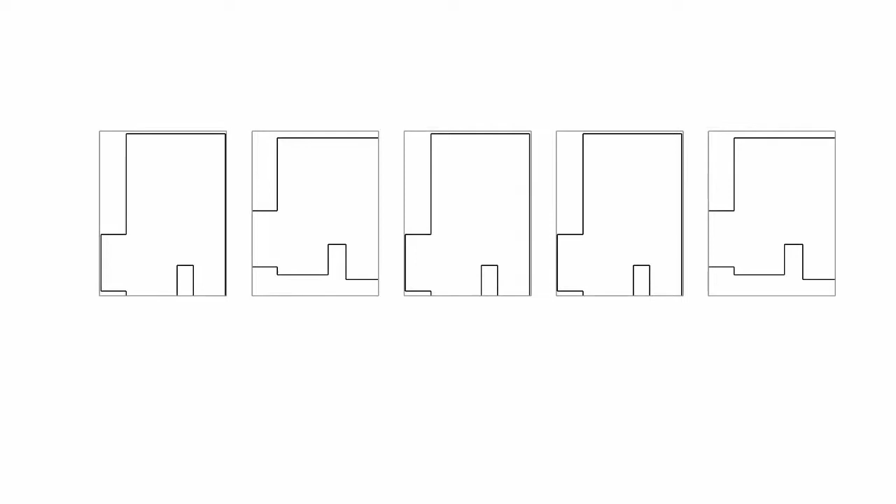To the civil engineer and surveyor, the home or commercial building is simply a perimeter of the building. This perimeter is not the actual perimeter configuration, but instead typically an imaginary maximum width and depth of a possible building. To the architect, especially on production housing, the lot is simply a rectangle the home fits on. They will assume a home will be built next to it and the main living space will be oriented to the rear of the home.

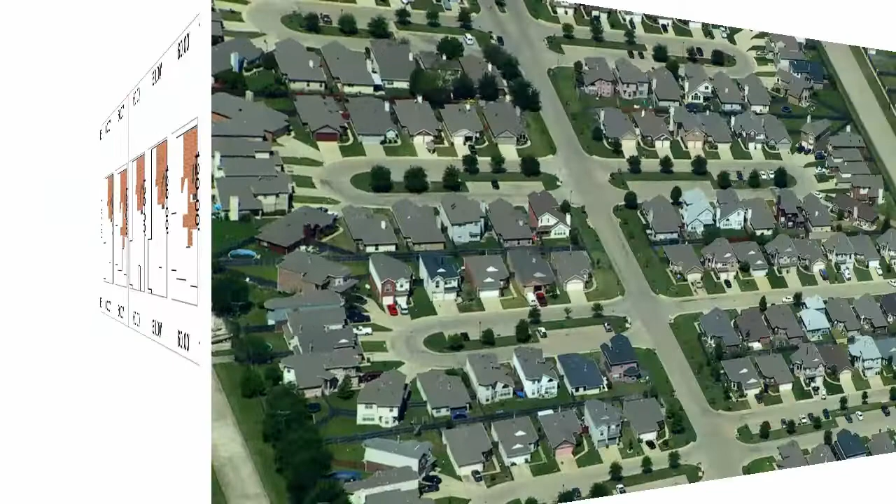When designing a subdivision or even a master plan community of thousands of homes, the plat of the streets and lot lines are recorded with no recognition of the home interior configuration that will fit inside those lots. If there are architectural standards, those will relate to the facade style, not how the home spaces function with the surrounding open spaces, if there is any open spaces.

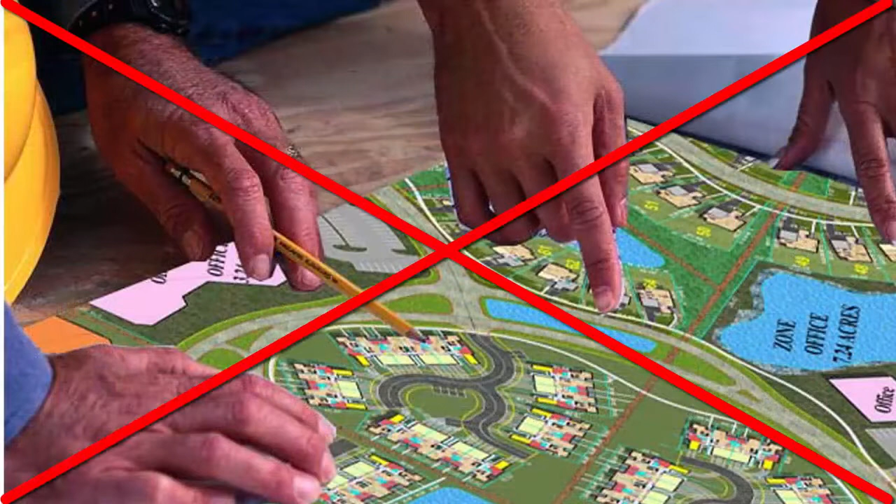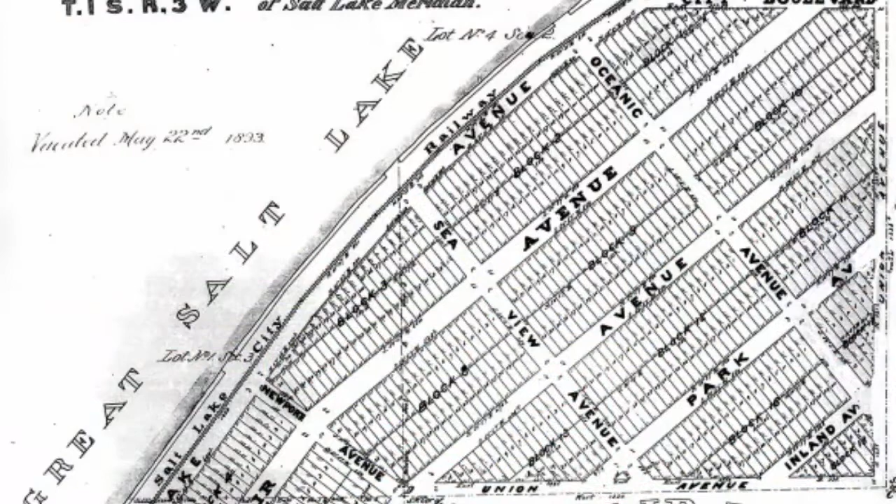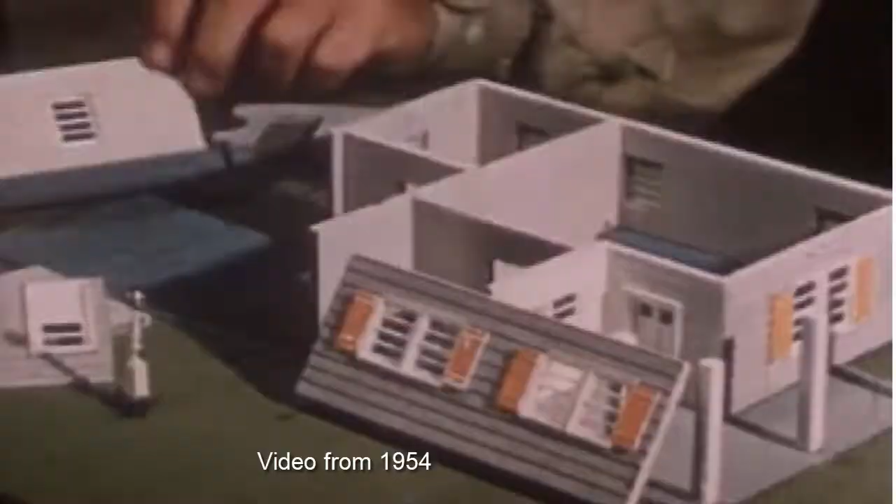Lack of communication and collaboration between the consultants is the major reason development advancements stagnate. It is why a site plan of the 1800s, an era where travel was by one horsepower, is eerily similar to a subdivision design in 2020. Yet today, it's not uncommon to have over 600 horsepower parked in the driveway. And it's why the floor plan efficiency of homes today are so similar in function to those of the past.

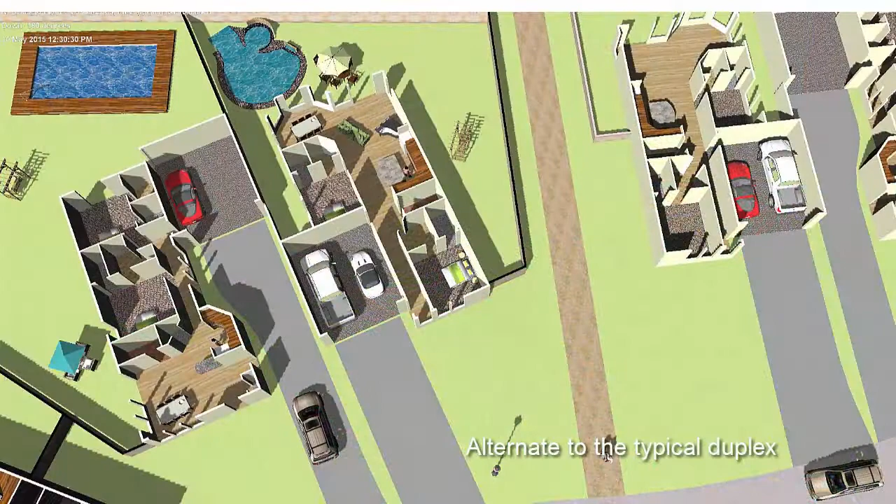In order to evolve and innovate design, we must develop a team approach at initial design stages, where planners, architects, and engineers collaborate to provide the best solutions possible for those developers and builders who pay them. Real estate value and livability can increase when architectural design merges with the site plan design.

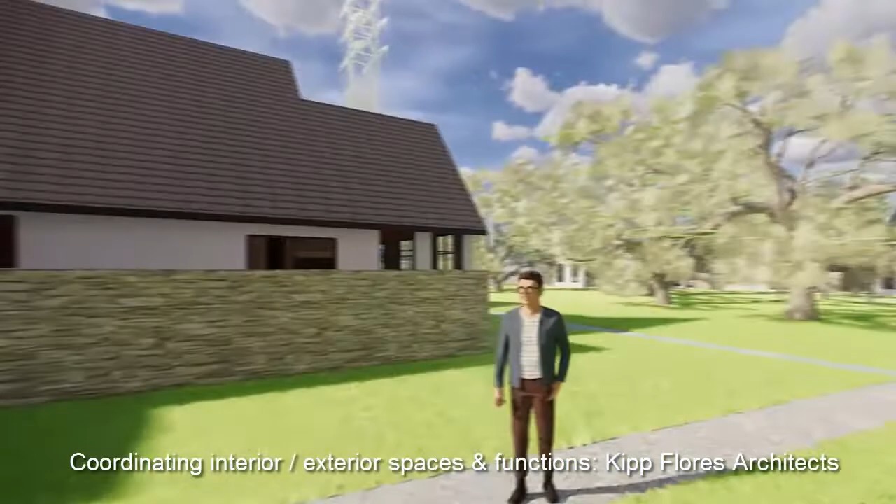Assuming you would be utilizing these sessions to design more efficiently, more open space can be provided around the homes by reducing excessive infrastructure. At initial concept stage, it's the ideal time for the team of consultants to create a game plan coordinating what goes on inside a home to the surrounding open spaces.

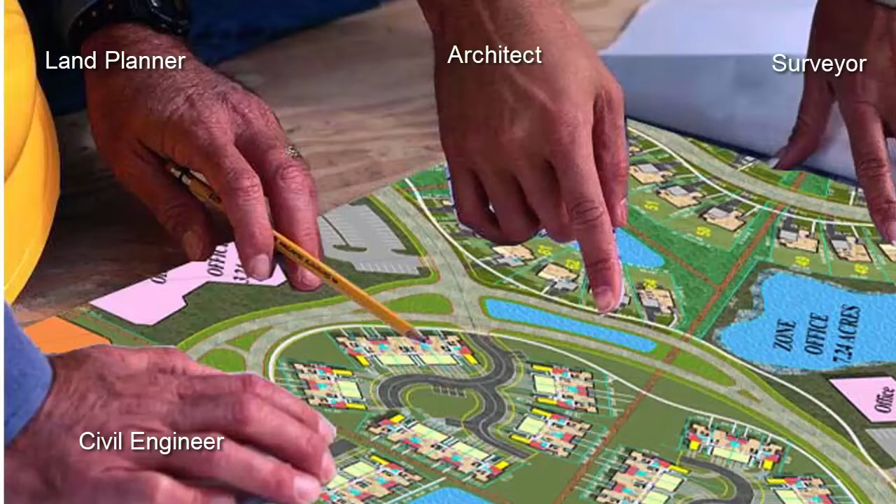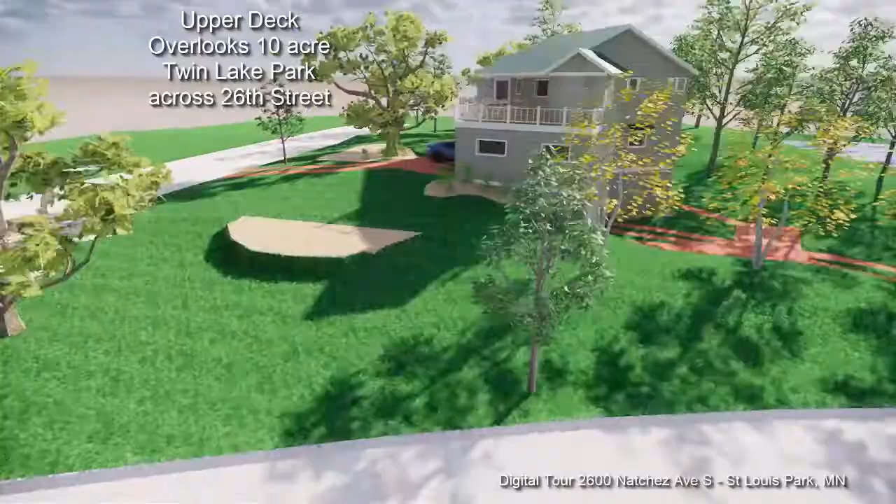Replicating this on a production housing scale, we provide the consumer with a completely different value proposition. This creates a market advantage for builders of single and multifamily housing that would be difficult for others to compete with.

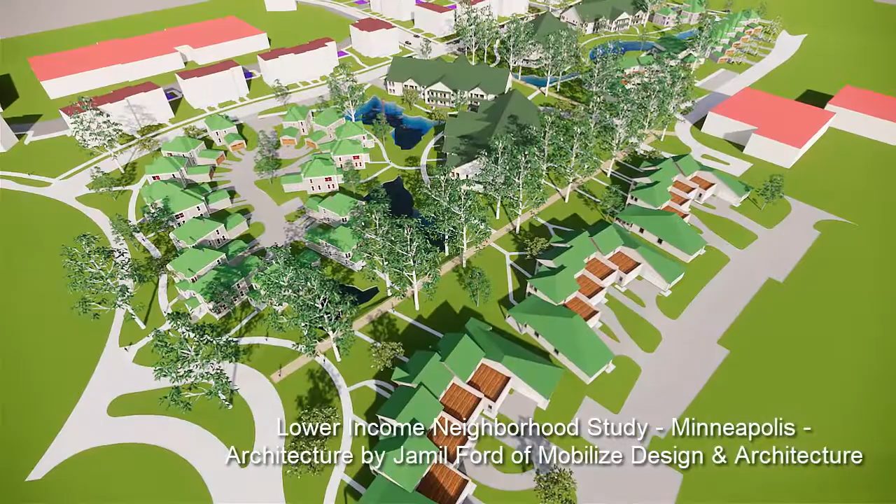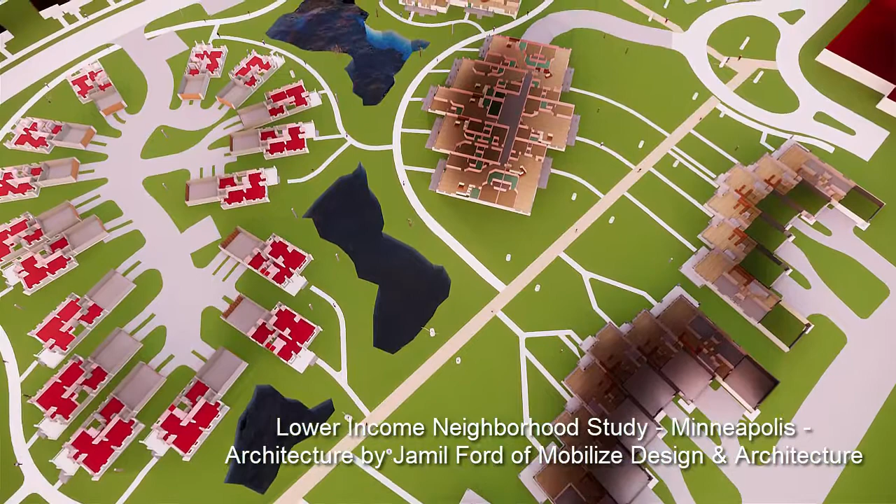This is a study of a lower-income urban neighborhood collaborating with Jamil Ford of Mobilize Design and Architecture. Every home and multifamily unit has a panoramic view of space from within the living area with the kitchen as the focal point. The apartments use asymmetric architecture to maximize the number of units on the premium view side. Parking and garages are almost completely hidden from spaces people will dwell most of the time.

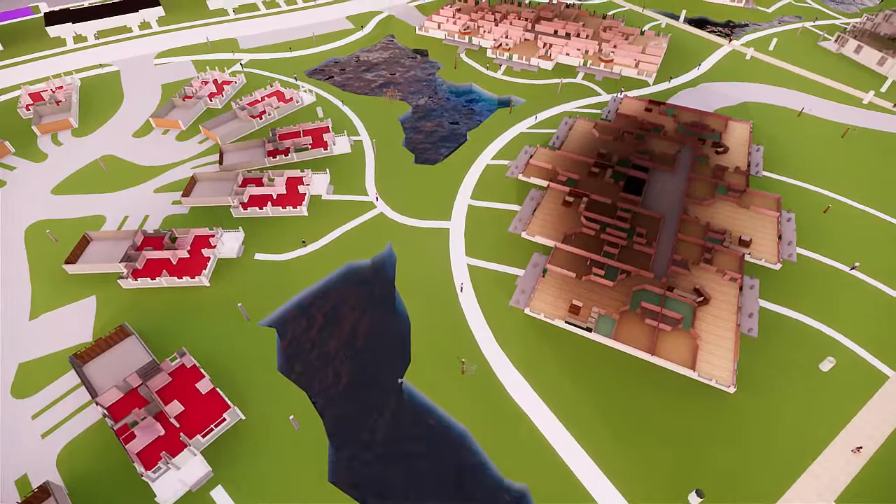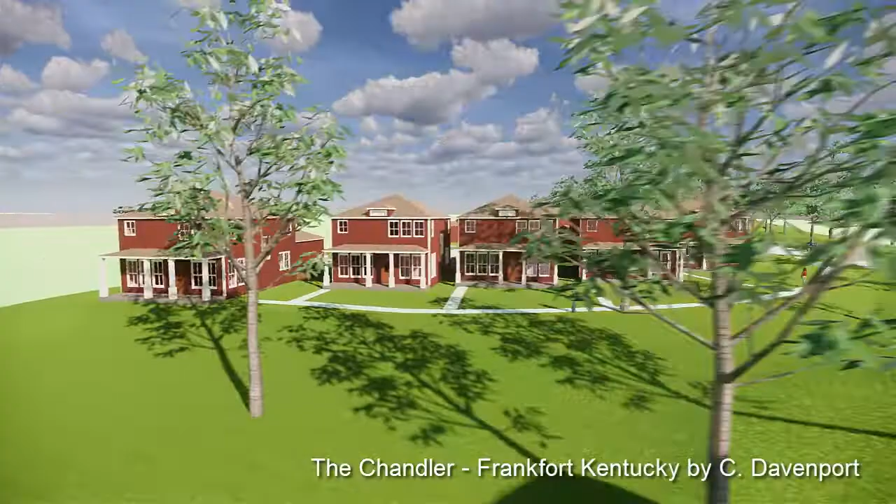Now let's go to the Chandler in Frankfort, Kentucky. As typical with many developments we design, bay homes explained in Chapter 10 of Prefurbia are often used along entrances and arterial streets, showcasing porches instead of garages. Living spaces are coordinated with views from the kitchen to side courtyards and to the vast openness of the front yard.

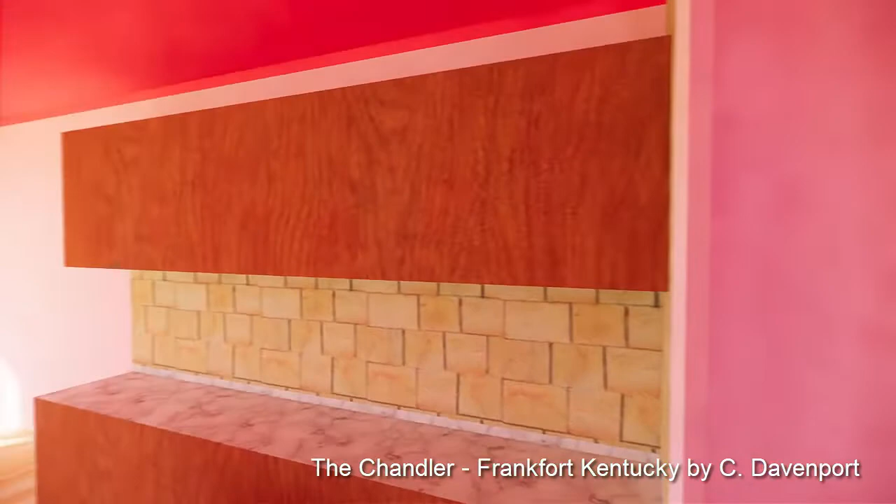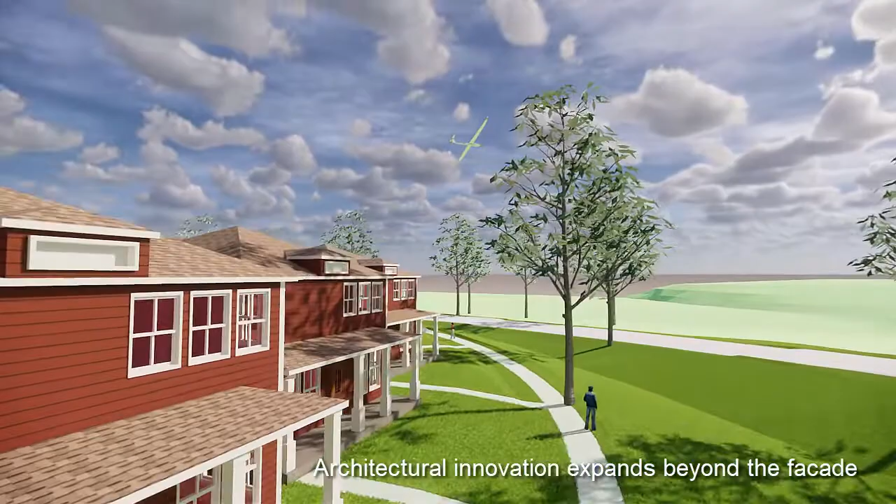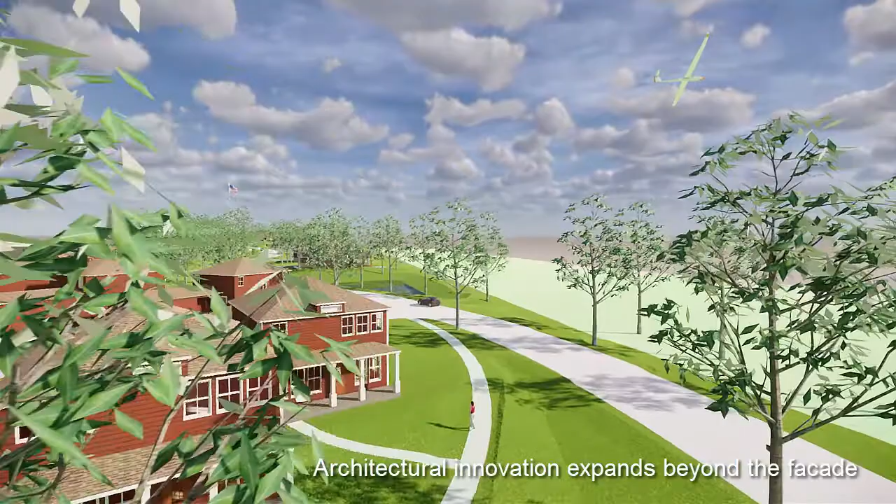Panoramic views are provided by staggering of the homes. In multi-story residential, this expanded view shed is replicated on upper floors and is the ideal location for a primary bedroom and/or upper deck. Front porches connect to the pedestrian system, and because the living space leads to and from the front porch, it is likely to actually be used versus homes that relegate the living space to the private backyard.

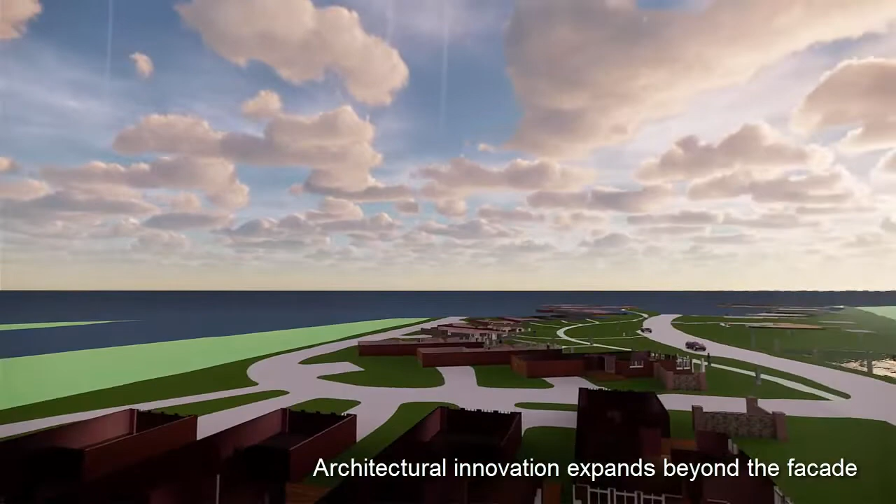The staggering adds to the visual bulk of the architecture of narrow homes, thus adding perceived value to the home buyer. Of course, none of this could be possible without merging planning and architecture, or collaboration at the initial concept stage. This is a typical empty nest 40-foot wide house that all national builders offer and most small builders mimic. They are used to maximize density, often at the sacrifice of curb appeal and function.

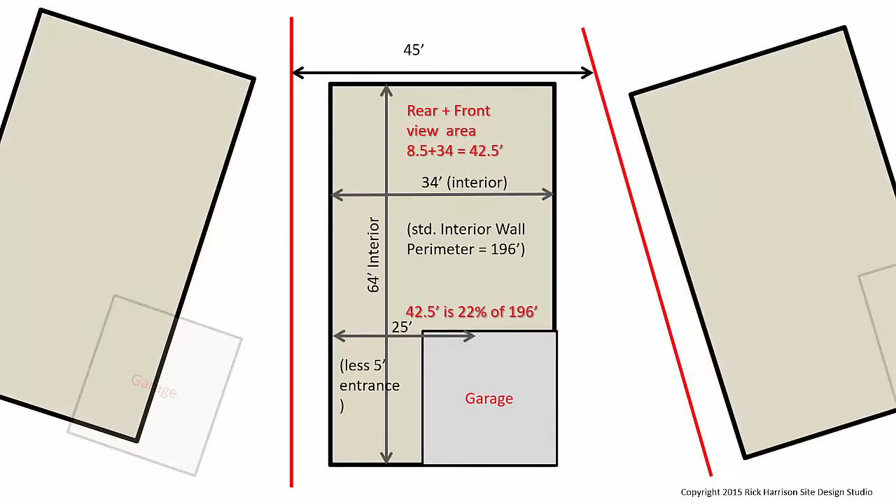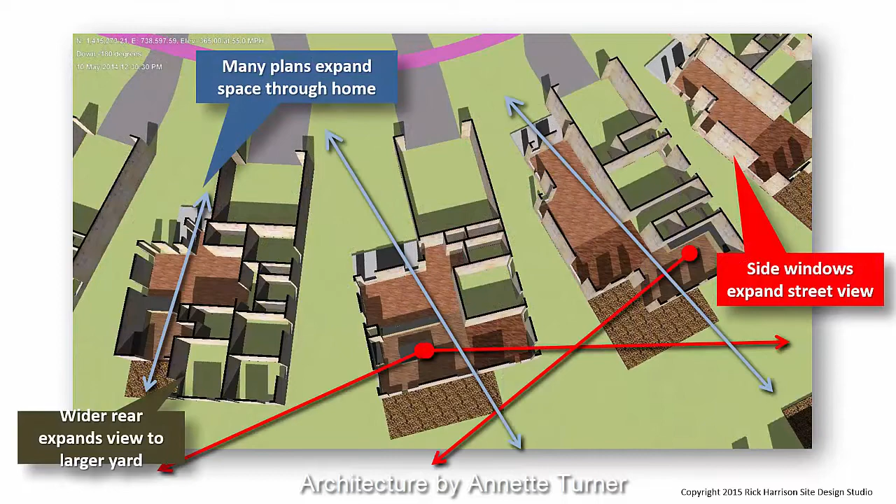With cove development, there are no rectangular lots. If the side yards are held to a constant minimum angle, we could design the homes to get wider at the front or rear without a density loss. This creates an entirely new value proposition, something unique to the design of cove development, which we'll introduce in a future session. What is essentially the same product reconfigured offers the same living space with a full front porch and additional third garage stall, whether being bumped out at the front or the rear.

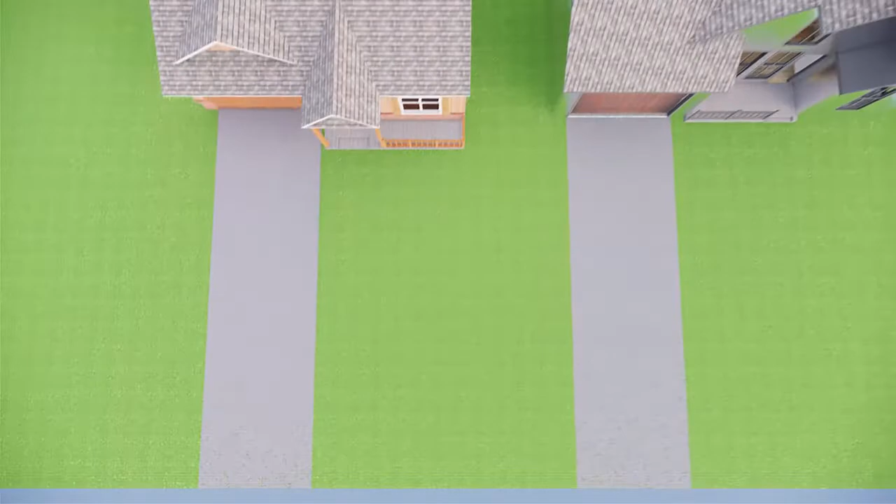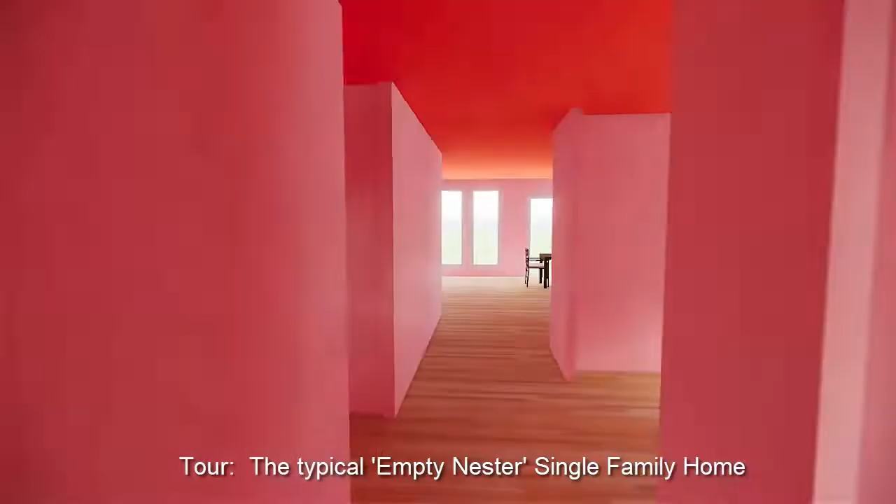To experience the difference, let's take a tour of the three options, beginning with the more common product built today. Because of the narrow width, the only window to the front is a den or small bedroom. Entrances are either inset with extra exterior wall construction or have long hallways to the only living space at the rear of the home. Note that I did add a corner window to open up the space, but overall the home feels small and claustrophobic.

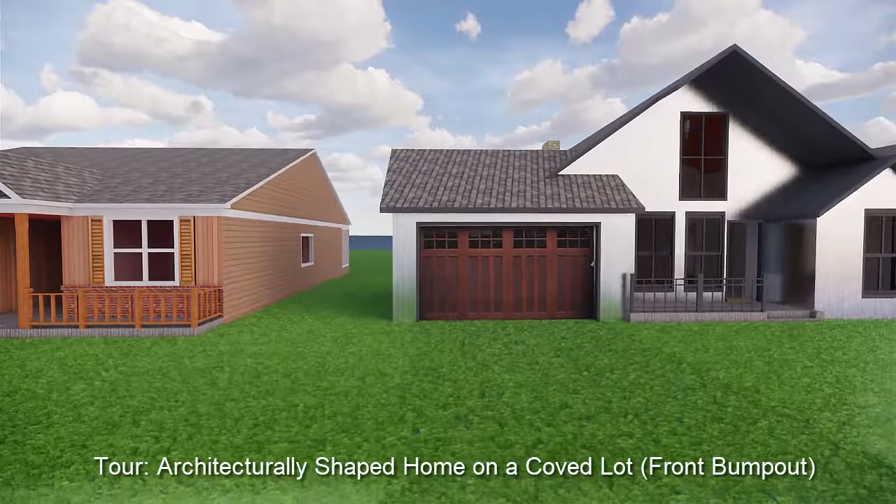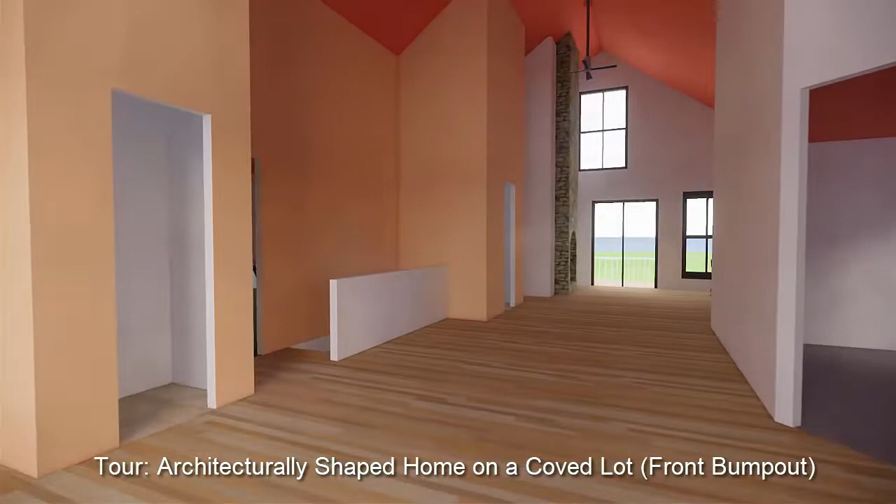Now let's move over to the shaped home that is wider at the front, and as we all know, curb appeal sells. We have an abundance of windows overlooking the park-like setting of the cove front yards, and entering into the home is anything but claustrophobic. The elimination of excessive hallway makes every room not just seem larger, they are larger. Because the home remains narrow at the rear, more connection to views is to the front and expands to the corner front of the home and to the full front porch.

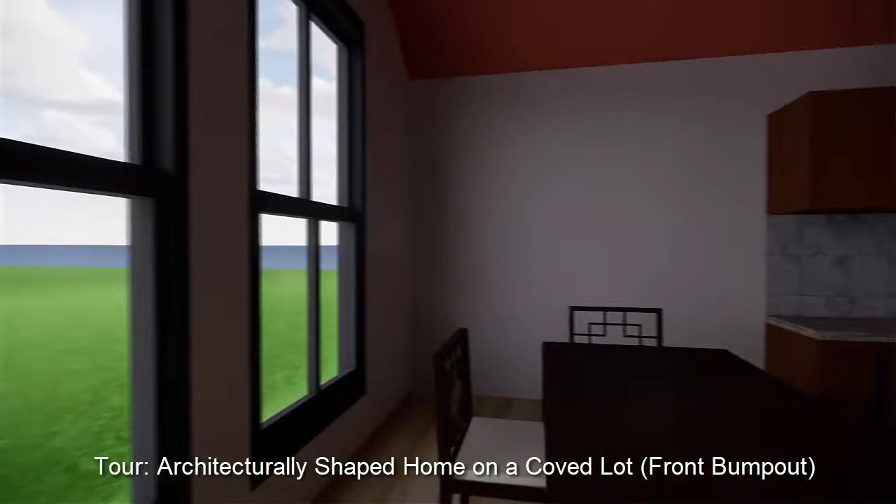We have the identical square footage with an additional garage stall. Yes, this home would be a bit more expensive to build, but remember, we are reducing the development construction costs by thousands of dollars, which can be applied to the home instead.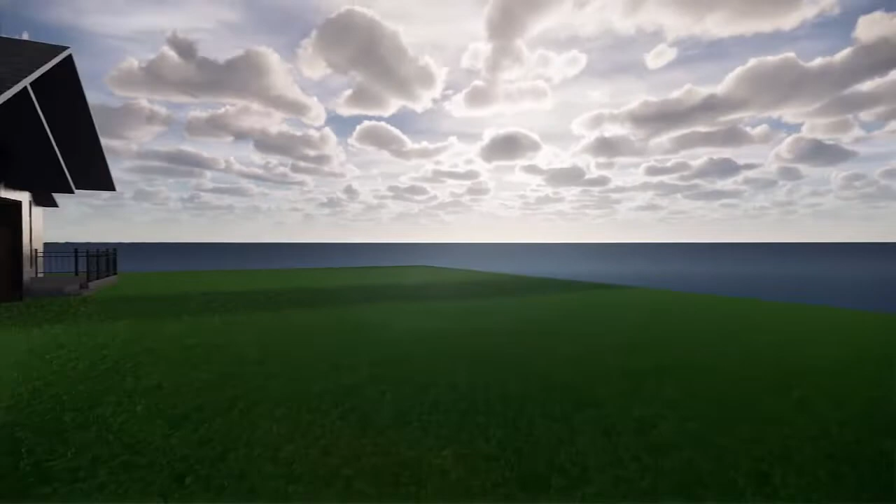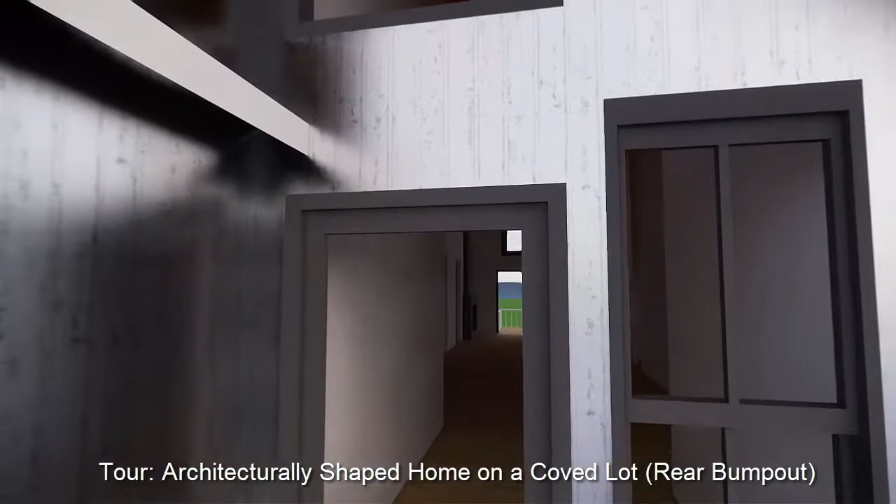Now let's go to the home that's bumped out to the rear. In this case, to compete with the more impressive home that's wider at the front, a bit more attention to the front facade is needed. Upon entering, the home is somewhat narrow in space, but opens up significantly at the rear of the home to the much larger rear yard, similar to a coved lot. Corner windows are added to expand space from the kitchen.

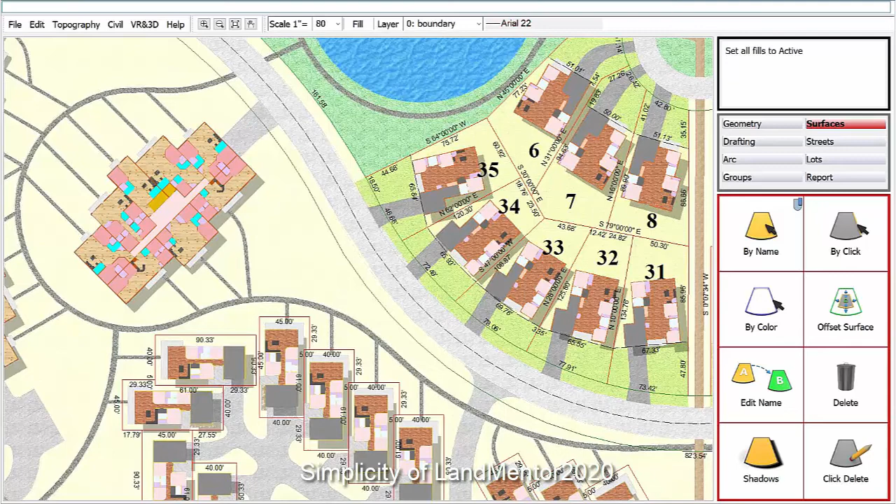As you can see, merging architecture and land planning significantly increases the livability and value of housing. But it's not just planners and architects, but also the civil engineers and land surveyors that must also understand that we are adding more complexity to the simplistic existing process of subdividing land. The increased complexity is made far worse by the already overly complex CAD software consultants use. This is the reason we developed LandMentor 2020, to help the industry adapt to this new era of thinking differently.